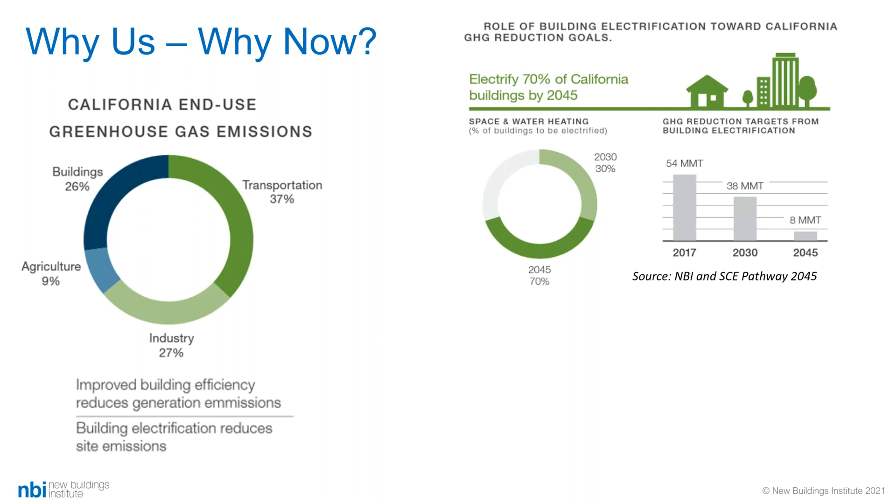Reducing energy. And in California, they have some very aggressive goals, as you see on the website. And one of the most compelling things for California in this direction is the fact that over 84% of space heating and water heating are currently served in California homes by fossil fuels. So when they're trying to make their climate action plans at a city level, at a corporate level for sustainable reporting, or at the state level, you've got to address site carbon emissions.

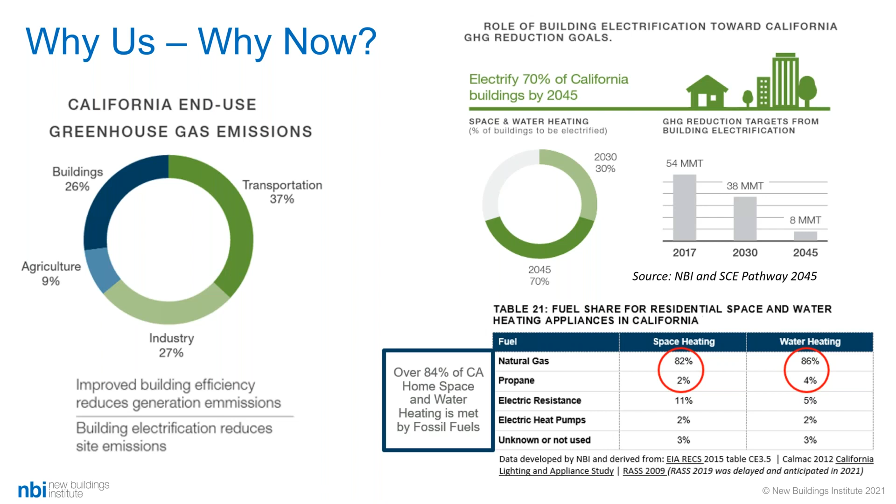And you also see on this table on the lower right that heat pumps, which are a major solution, as you'll see through our research, only currently have about 2% market share.

So the drivers for doing this are well known to the parties in terms of climate, health, and equity. We get a very strong representation of change in those areas. But this last one, technology advancements, is another one that we in the efficiency industry should really keep front and center, because corporations, business owners, homeowners, they actually are very attracted to getting the newest and most advanced technology. So it's another pull, if you will, for why to electrify buildings.

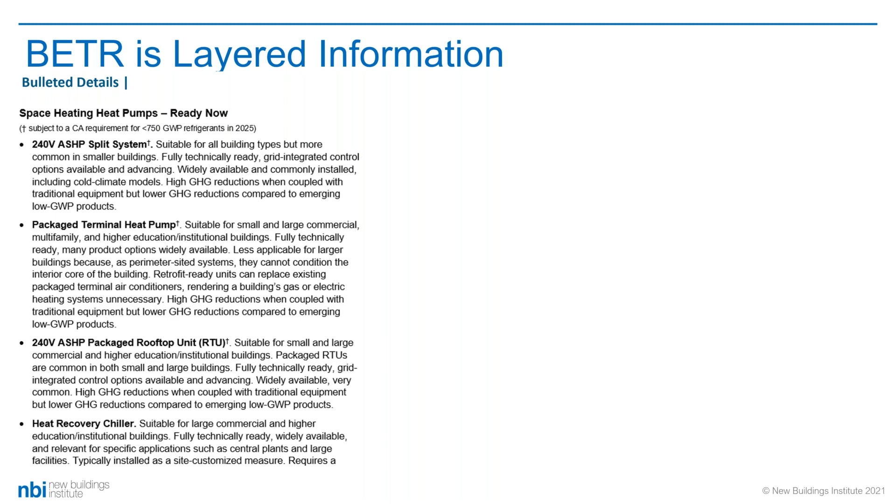And then, because we know not everyone's going to look at a 100-page research report for the details, we do have a 32-page, very graphical highlight document called the summary. And you'll see at the end how to link into these and access them. And the really, I think, very progressive approach that Alexi and I took in developing this roadmap is to do it in a layered way. So when you get into it, even the 100-page one, you'll see bulleted details like here on the left, and you'll be able to look at things that are concisely written, but better yet detailed on every technology, on the status, roadblocks, and recommendations.

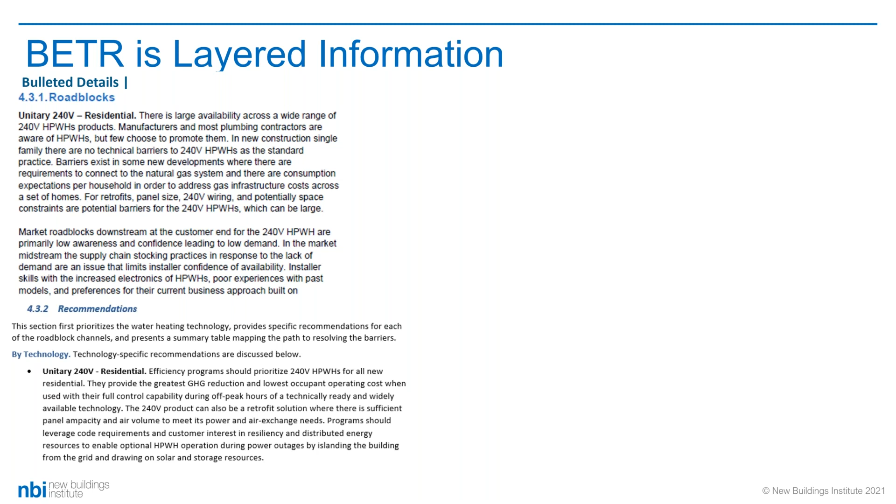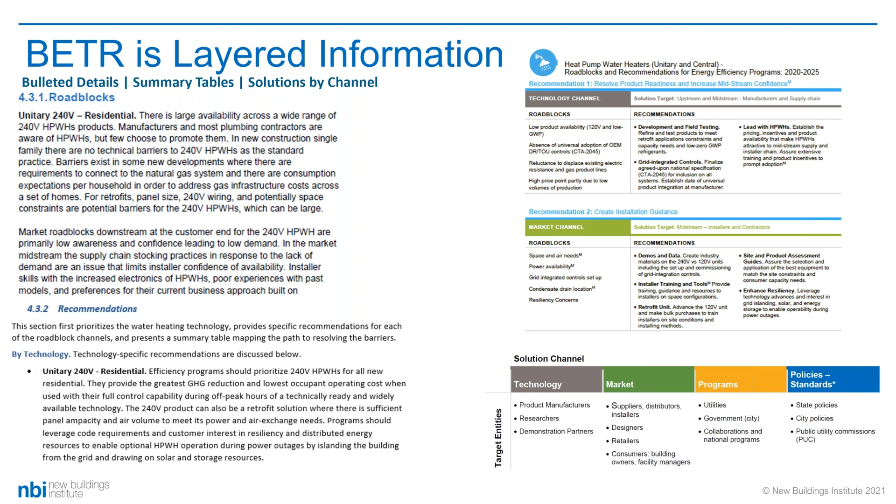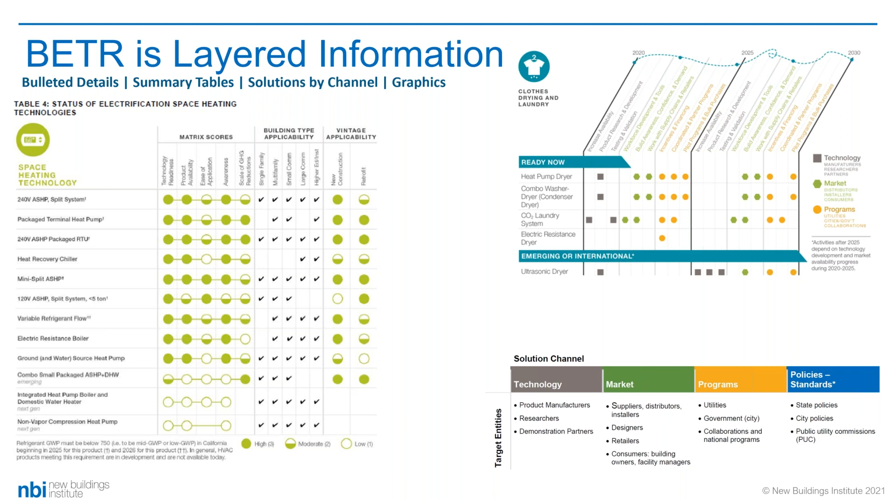And then the second layer of information is that we use tables to bring forward the same information at a little higher level. And we approach things through the solution channels. These channels are the typical emerging technology solution channels. So everything is mapped to channels in terms of how to approach changing the adoption curves for these technologies and increasing adoption. And then lastly, we layer the last layer with the kind of at-a-glance graphics. So that's the way the layering of information is presented in our research roadmap. So now we're in section 2, which is to get a little deeper on the technologies. And Alexi is going to take on and introduce this part to everyone.

Thanks, Kathy. Hi, this is Alexi Miller, Associate Technical Director with New Buildings Institute. So I'm going to talk a bit about what technologies were covered within BETR and how we characterized those technologies. We looked at 38 different technologies, or some you might think of them as energy efficiency measures, if that's a phrase that rings true to you over the years, over 4 major end uses, as you saw earlier: water heating, space heating, cooking, and clothes drying and laundry. We looked at these 38 technologies to try to get a pretty comprehensive look at what are all the things you can do in a building to electrify an existing or incumbent gas technology.

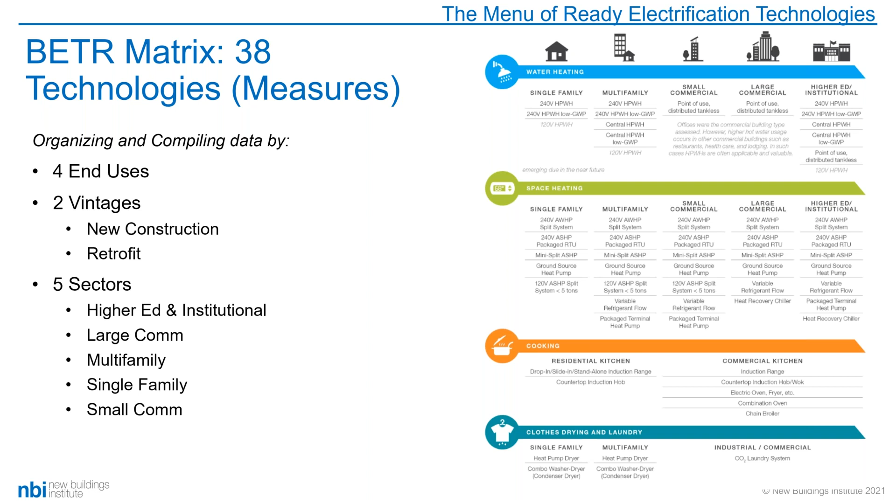And we looked at both new and existing construction, so retrofits to existing construction, also 5 major sectors that are representative of the great majority of building types, and you can see those listed there. The graphic on the right there shows the technologies that we're talking about here, and without going into those in great detail, you can see that it's a reasonably comprehensive look at electrification technologies in buildings. Having come up with that list of 38 different technology options, and all the different parameters of new and existing and small commercial versus single family residential, then we said, where is each of those technologies at today, and where are they on the road to adoption?

Like we were talking about at the beginning there, these are the 5 primary characterization parameters. So how ready is the technology in terms of time: now, next few years, 5 to 10 years out? How available is it? Can I go to the hardware store or another place and get it off the shelf? How easy is it in terms of application? Are there major site barriers, for example, needing rewiring in an existing building retrofit? That would be a site barrier, or the need for venting might be a site barrier. What's the awareness in the market and the industry of this technology? Low, medium, high. And then finally, very importantly, what is the scale of greenhouse gas reductions that this technology offers relative to other electrification measures?

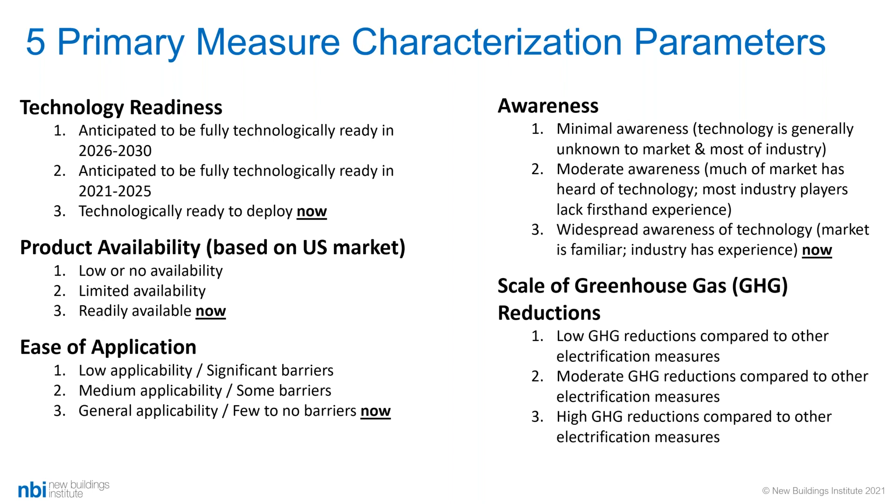Plus what kind of building types they apply to, and whether it is highly applicable or moderately applicable to existing or new buildings. So for example, as you might expect, there are 4 of these, right? The 4 end uses: space heating, water heating, cooking, and clothes drying, laundry.

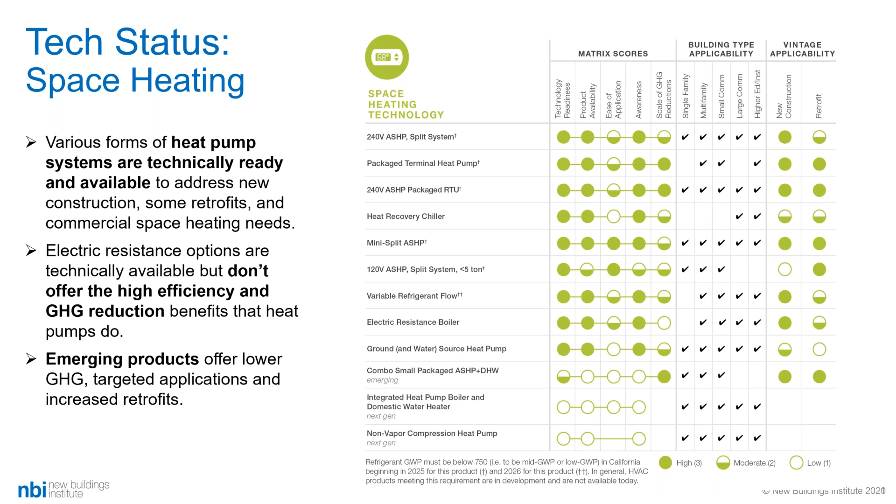All right, here I am on water heating. So the heat pump water heater is really the technology that's going to displace gas incumbent water heating. As you saw in the beginning, in California that's the predominant fuel source and technology in use for residential, and in commercial, where central plants, water plants, are used in multifamily, those are often served by gas boilers as well.

Or if they're served by electric resistance, as is a fair portion of some of the home areas where gas isn't as widely available, then the heat pump water heater is not displacing the carbon or emission reduction at the site, but is highly more efficient, 2 to 4 times more efficient than any electric product. And the efficiency of the heat pump water heater is one of the great benefits in those changes.

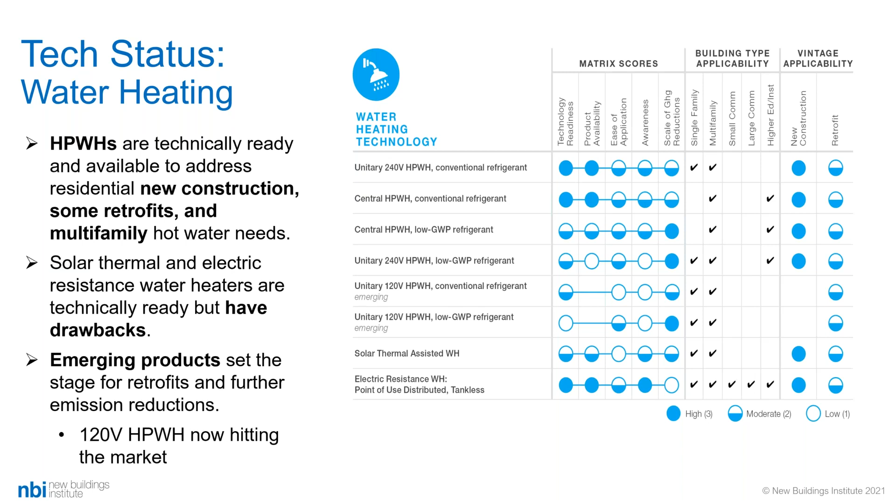They've just announced their very first products to market this quarter, and several more coming to market in the upcoming year of 2021, and in addition, a large research plan underway through the Advanced Water Heating Initiative along the West Coast. So we've got good technologies ready, some barriers at retrofit in terms of not wanting to upgrade wiring, but some products emerging to take care of that.

Next, I'll give you a little briefing on the cooking item, and that's that induction is really the technology to displace the gas incumbent for both commercial cooking and for residential. If you've seen anything in the news about induction cooking, you've seen how resistant people are to change out of their gas stove and how thrilled they are when they do. So that's the takeaway on induction.

It is a price point higher. As an industry, again, as an efficiency program, as the audience for this, they've got to get both the messaging in place regarding the reliability, the safety, the better environment, the responsiveness, the great cooking experience you have, as well as working on some incentives to fill that gap on cooking.

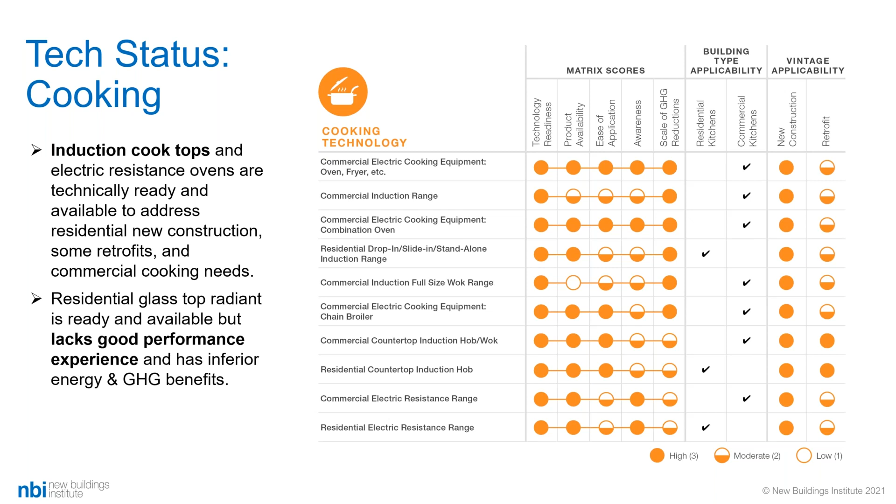Oh, thank you. Sorry, I was muted there.

Finally, I wanted to mention clothes drying and laundry as well, since we do focus on all four of these end uses, and we recognize that heat pumps, especially space heating and water heating heat pumps, those are the real workhorses of electrification. But as Kathy said, induction cooking is also pretty exciting. On the laundry side, heat pump dryers and combo washer dryers, which use a condensing drying technology, those are the recommended technologies right now to focus on for electrification in residential buildings.

Electric resistance dryers, they work fine. They're in a lot of buildings. They're pretty much the standard, more common even than gas, but they're not nearly as efficient, and a heat pump or a condensing dryer is significantly more efficient. So there's some product development to be done, especially making them into larger products that are more in line with consumer expectations and what people are used to here in this country. But that's not a huge lift. So there's program work to be done in terms of incentives and encouraging manufacturers to get the products going and build this market.

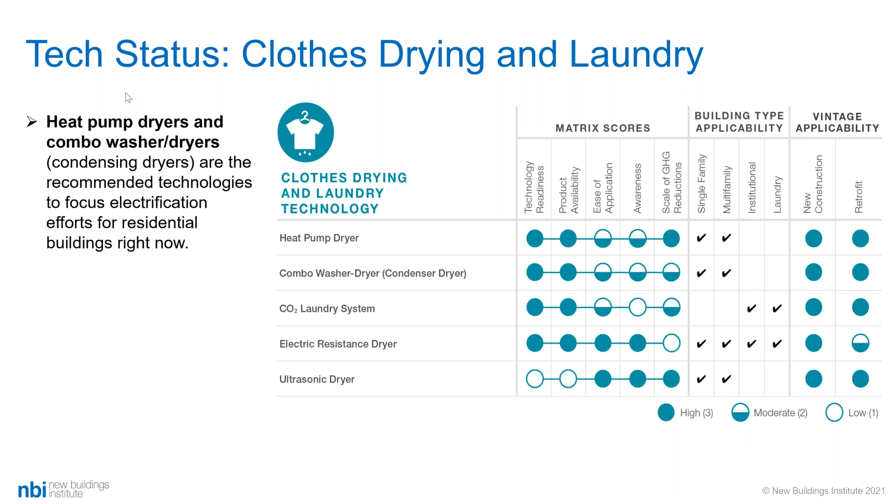So I wanted to talk a bit about the impacts. We mentioned there are 4 broad sections in the report that we'll talk about today. We did a fair amount of work within BETR to figure out how big are the impacts of doing these electrification tasks, of installing these technologies in buildings and displacing that gas. The grid is decarbonizing very quickly, at different rates in different places across the country and across the world. And that's very encouraging, but a green grid is not enough because buildings play such a central role in the grid ecosystem, in the utility energy ecosystem. Those buildings have the potential to accelerate the decarbonization on the grid through time of use energy efficiency, demand flexibility, and other strategies, or they can slow and limit the progress.

On top of that, as the grid cleans up, the electricity that is delivered to buildings becomes cleaner and cleaner, right? It has a lower inherent carbon impact per kilowatt hour. But the gas system is cleaning up very little and not nearly as fast as that. So the carbon impact associated with burning gas in buildings stays pretty near flat, while the electricity impact starts going down significantly. So if we're serious about decarbonizing, we need to do both the grid and the buildings.

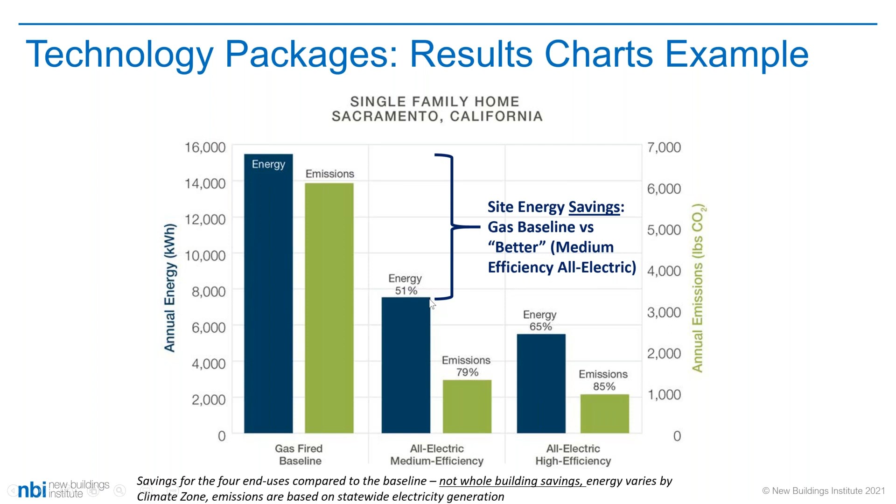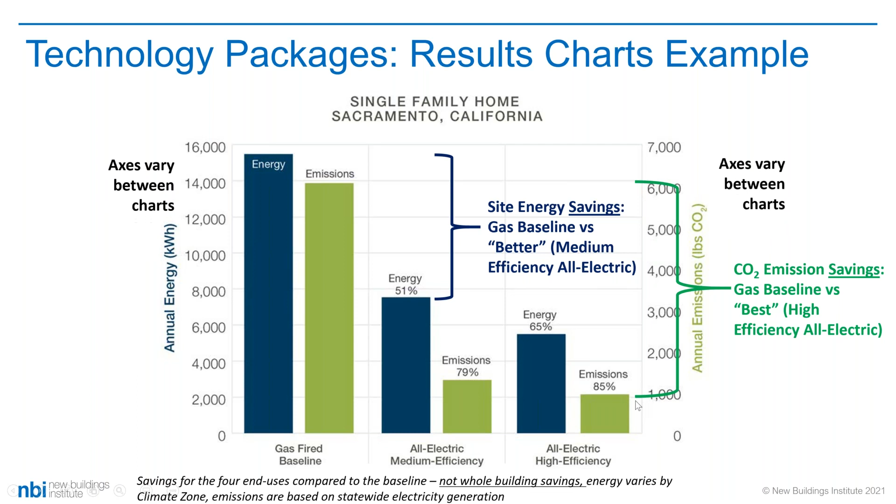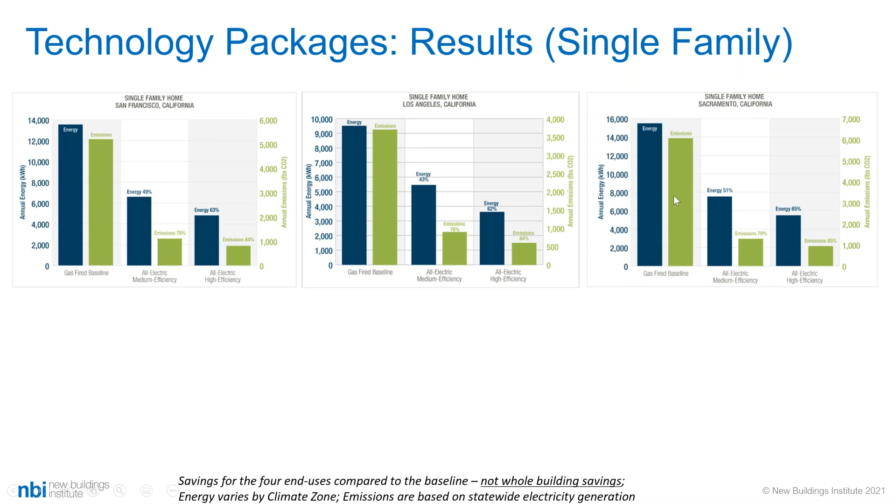And what we found repeatedly was site energy savings, that's the blue bar from blue to the next blue down, and the emission savings, that's the green bar from the green on the left to the green over on the right. We found that those are actually quite significant across, for example, single family usage, in this showing San Francisco, Los Angeles, and Sacramento. The energy savings are pretty consistently somewhere in the 50 to 60% range, even for just the base case. And then if you go to the greenhouse gas savings, now you're talking about 80+% emission savings in both base and higher performance. The reason they're relatively close is that the bulk of the savings comes from going from gas to electric in the first place.

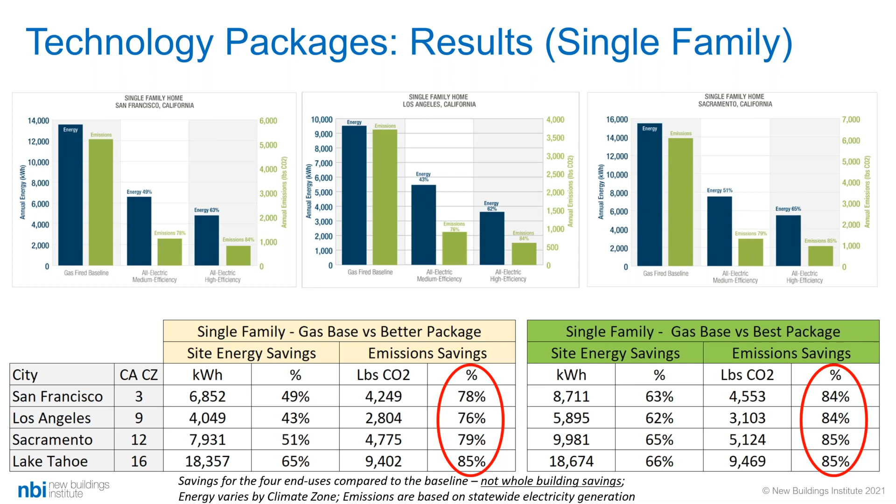That makes a huge difference. And then there are, of course, benefits to be gained that are generally worth it to go to higher efficiency. On the multifamily side, the picture is basically the same. The numbers, of course, are different, but the percentages are pretty similar.

Around 50% energy savings in base case, 60-something% in the higher efficiency case, and something like 80 to 90% greenhouse gas emission savings. So these are pretty significant, pretty dramatic savings that you get from going from gas to electric in a building. The greenhouse gas savings are nothing to sneeze at. And if we are serious about decarbonization, this is some low-hanging fruit.

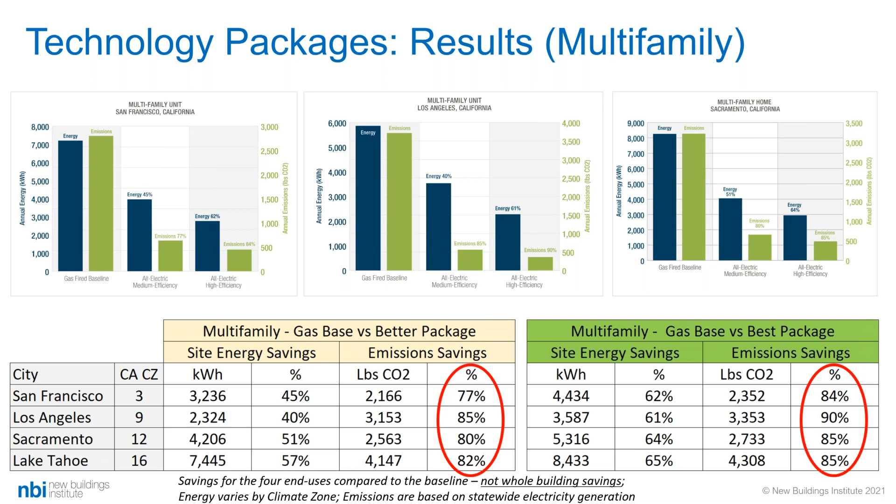On the technology level, those packages are important. Although our objective with BETR was to look at the technology level, we did step back, as Alexi just showed, and say, okay, here's some packages residentially. We didn't have the resources to do a bunch of commercial modeling, but that's the residential lens.

But at each of the major technologies, here on the left is space heating, air source heat pump residential, changing to an air source heat pump in a home from a high efficiency gas furnace. So we used a good baseline here of a condensing gas furnace. And on the right is the heat pump. I'll just mention these two analyses were done based upon the source energy profiles for Southern California, because Southern Cal Edison was the first party that wanted to look at this roadmap.

And so in their region in Southern California, you see that if you have a very efficient, top of the line gas furnace, but you switch to a high efficiency heat pump with an HSPF of 9.5, so a good moderate heat pump, every day available, you're going to drop your levelized energy use in a BTU sense down 21%, but you're going to cut emissions by 60%.

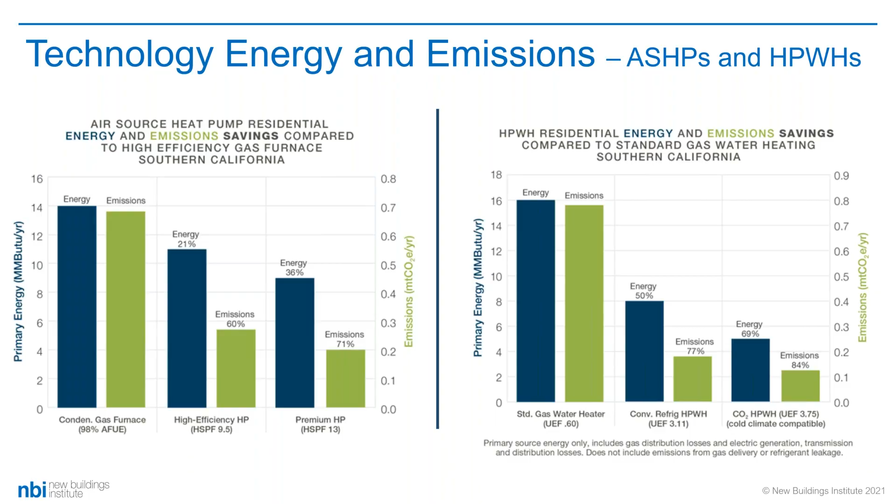So I wanted to give an example. There's not really time in this presentation to go through every single roadblock found and recommendation issued for it, but I wanted to give a little concrete example of that. So for instance, on water heating, heat pump water heaters are real workhorses of electrification. And so I wanted to give an example of this at a glance table that you see on the right here. This shows what recommendations we have made across these three different channels: technology in gray, market in green, and programs in orange.

So for example, for unitary 240-volt heat pump water heaters with conventional refrigerant, as Kathy said, these have been around a long time. There's been significant improvements recently. I actually happen to have one in my basement that I did a DIY install on last summer. It went great. I love it. Great rebates from the utility. That is still a need. So we said incentives and financing are still relevant, and we've got to get programs scaled up on that in the next 5 years. You can see this first piece is 2020 to 2025. And then further out is out to 2030.

But then when you're talking about, say, a 240-volt heat pump water heater with a low GWP refrigerant, or the 120-volt heat pump water heaters, now we've got some activities needed on the technology side, manufacturers, researchers, and other partners, to really get these products developed, optimized, and on the shelf. So this shows some of the key activities that we think are high priority actions by the player, the stakeholder that would actually go do the thing, right? Take the action to get there from here.

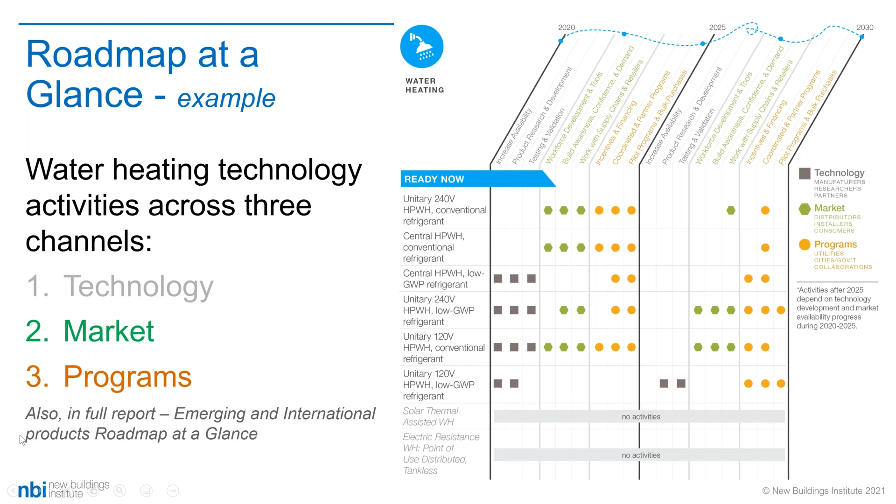Also, I want to mention what it says down in the corner. In the full report, there are also parallel conclusions on emerging and international products. And then we get, as Kathy said, BETR is layered information. So we get more detailed. That's the at a glance, and then this is where you can go as one of the places to figure out what does that really mean.

So for instance, one of the recommendations in space heating has to do with supporting and educating the industry. We're talking about the midstream, designers, installers, those in the construction industry. I'm saying here are some of the roadblocks, right? We've got first cost issues, we've got risk aversion issues, and concern about people who are worried, oh, but the heat pump's not going to provide air that's quite as hot. Well, okay, here are some of the key things we need to do: demonstrations, industry education, good reference materials for site assessments and technology practices, right?

So there are things along these lines for each of those 4 at a glance tables that come down to these recommendations in their tables, and then there also is more detailed narrative information in the full report.

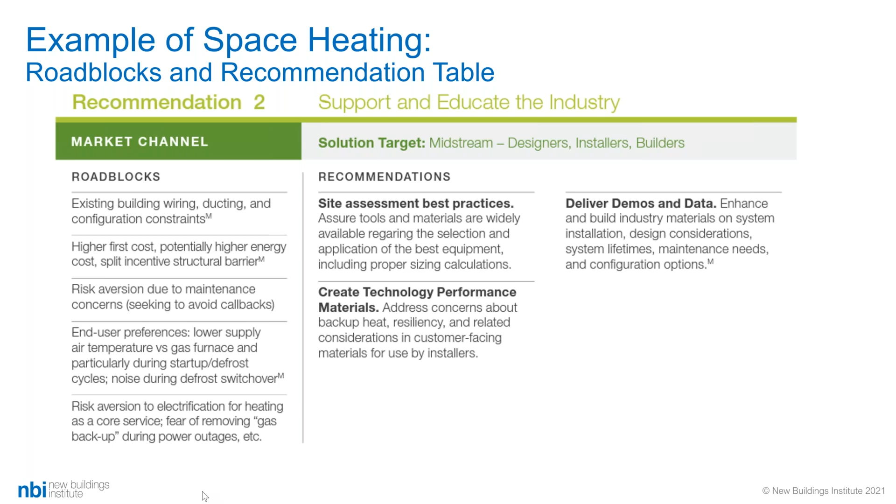Thanks, Alexi. When I look at this, I feel a bit of pride of the work we did over a 12-month period. At the high level, we recognized as we went through the end uses and the technology level that there are so many commonalities across the technologies that it didn't make sense to just repeat these in each technology, but rather to step back as an industry and say, here's the collective strategies to building electrification. And we're not the first ones to express these types of things. This is going on, happily so, across our industry, with many parties advocating for, researching and presenting results on reasons and methods for building electrification.

But our takeaways were these 5: build demand, number 1, support the supply chain, number 2, partner with production, closing the cost gap, and aligning programs and policies. Those 5 really articulate what all the technologies need in terms of moving forward more rapidly. And so in the same way that we did it with each end use, there's a roll-up table that presents these 5 outcomes and has specific ideas of what to do to build demand and create value and to close the cost gap. They're all in the report in a nice roll-up way, as well as with the detailed information.

We hope you'll take a look at this, and we'd really love to hear any way that you applied it, or if you find it well presented or helpful in the ways that you use it. That's how we, as a nonprofit, spread what we do and hope to let others leverage our work. So these 5 collective strategies are the path to building decarbonization and electrification.

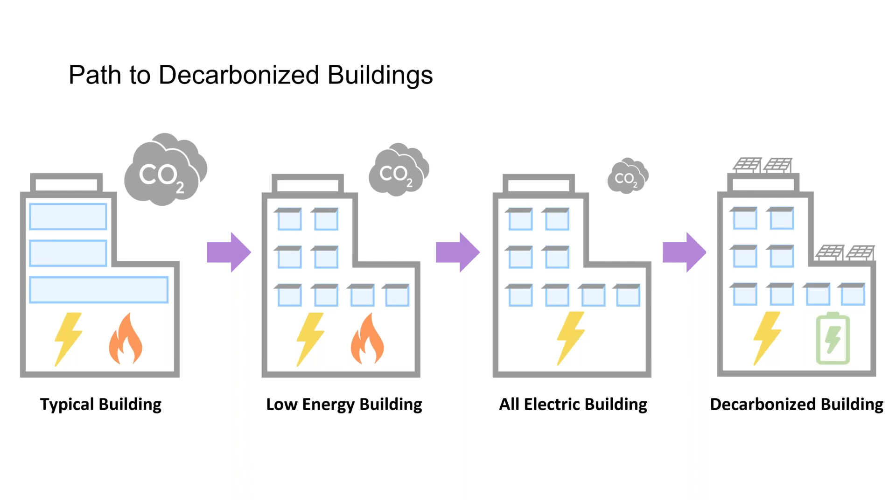But why is it that heat pumps are so much more efficient? It's important to understand this concept, because what a heat pump is actually doing compared to a natural gas boiler, or even an electric resistance heater like an electric resistance hot water heater, is different. The natural gas and electric resistance simply heat the air or water, whereas the heat pump transfers heat, just like your refrigerator transfers heat out of the inside into the ambient space. And it does this 3 to 5 times more efficiently than the electric resistance or natural gas appliance.

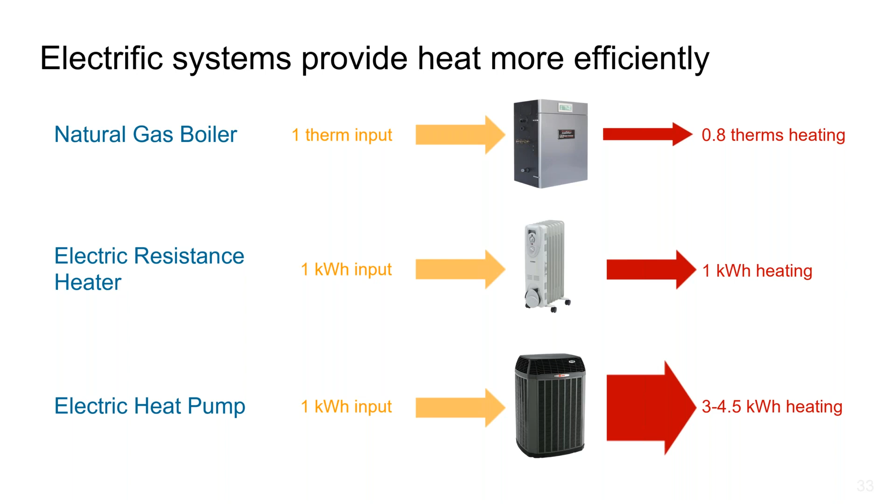So you put 1 kilowatt hour in, and you get 3 to 4.5 kilowatt hours out of your heat pump. That is behind all of these wonderful savings we get from various heat pump technologies, whether we're looking at variable refrigerant flow technologies, heat pump water heaters, or air source heat pumps providing warm or cool air in spaces.

So what is the comparison of HVAC systems that are gas versus electric in terms of efficiency, cost, and greenhouse gas? Here we looked at 4 different types of HVAC systems. The gray one is a VAV reheat system with a gas boiler. The orange one is an electric VAV system with a heat pump water heater.

You can see in the first chart it's really reducing the energy use because of that heat pump technology, which is much more efficient. The blue one is an all-electric DOAS system, which is a dedicated outside air system with a VRF, again a variable refrigerant flow system, so also heat pump technology. And finally, the yellow one is electric resistance, which is less efficient than the two heat pump technologies.

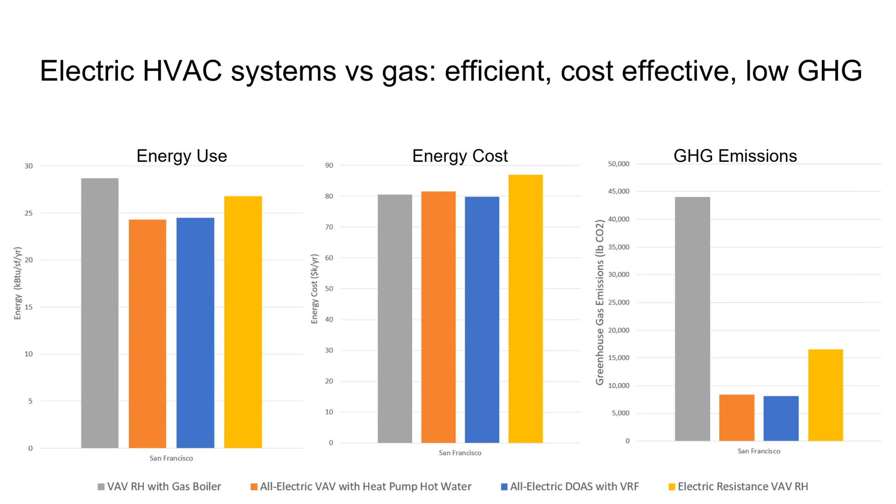You can see how that works with energy use, energy cost, and greenhouse gas emissions. You're getting tremendous energy savings from the heat pump technologies in particular. Electricity is typically more expensive than gas, so you take some hit for energy cost. But because the heat pump is 3 times as efficient, even though electricity may be 3 times more expensive, it's kind of a wash on operational cost, as you can see in that middle chart—not so much with the electric resistance yellow technology. And of course, greenhouse gas emissions, as Kathy and Alexi showed you, are just dramatically better for the heat pump technologies.

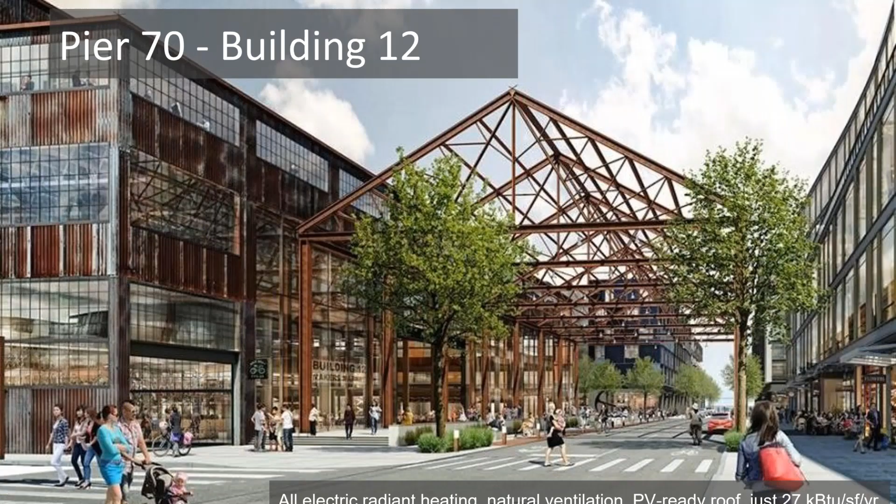But you can also do a retrofit. This is Pier 70 in San Francisco, an example of all-electric radiant heating with natural ventilation, also all electric. It just has a 27 kBTUs per square foot energy use intensity. So it's really efficient, using an existing building and turning it into an all-electric building.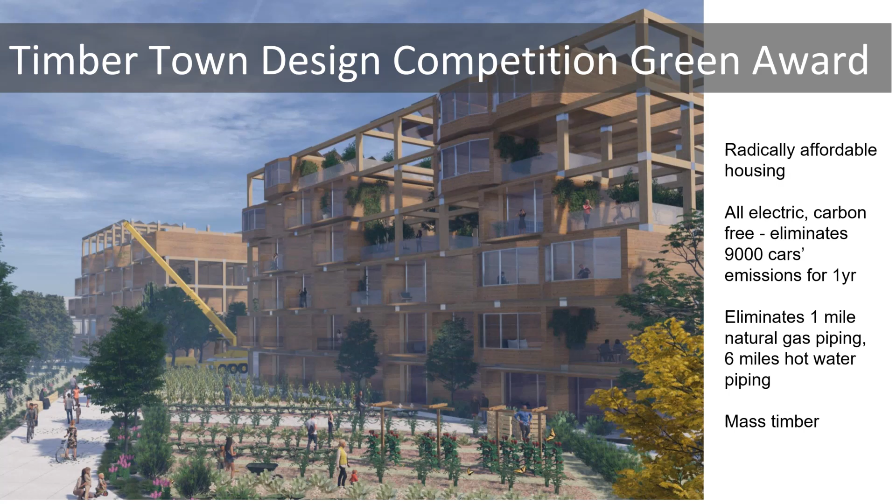But of course everybody's quite concerned about cost, so I want to dive a bit more into cost for multifamily and commercial projects. We did a study for UC called their Carbon Neutral Buildings Cost Study, because they were really interested in meeting their carbon targets. They want to be carbon neutral by 2025, so they have to move fast. For their new buildings, would it be more cost effective to electrify, or to go with gas offset with biogas?

So we did this study, and in summary the results are remarkable: the costs are very comparable. In fact, in every case, the all-electric solution for academic, residential, and even laboratory buildings was lower cost than the biogas option, even when they factored in really low cost biogas contracts. It's actually even better than this in reality, because those contracts are hard to come by. One of the nice things about residential projects is that using electric resistance, it's actually cheaper up front to go all electric. I'll show you a couple of examples of that.

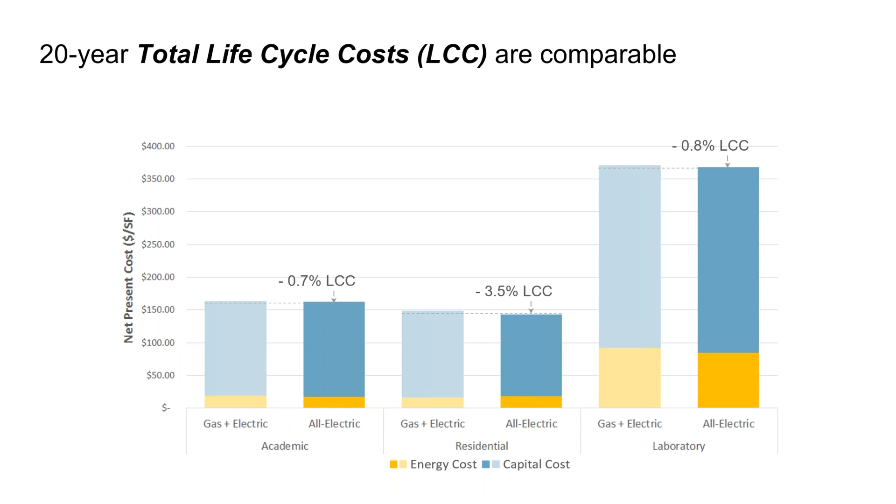And lest you think it's only cost effective in new projects, we did a study for UC on the Evans Hall project, looking at whether it would be better to replace or retrofit it. Interestingly, whether we replaced or retrofitted it, the savings from constructing or retrofitting the project to be all electric were dramatic.